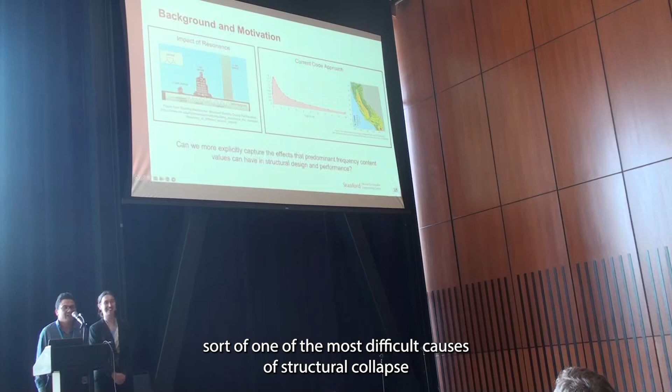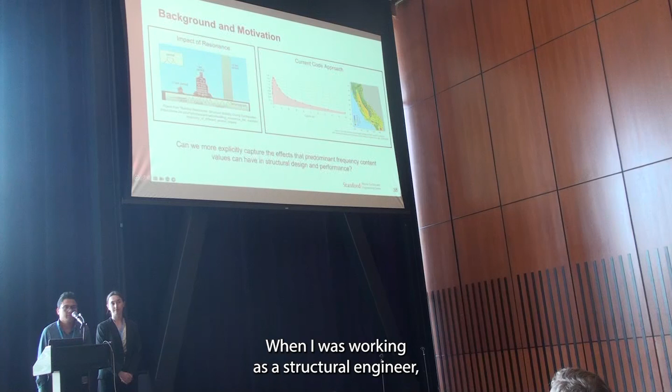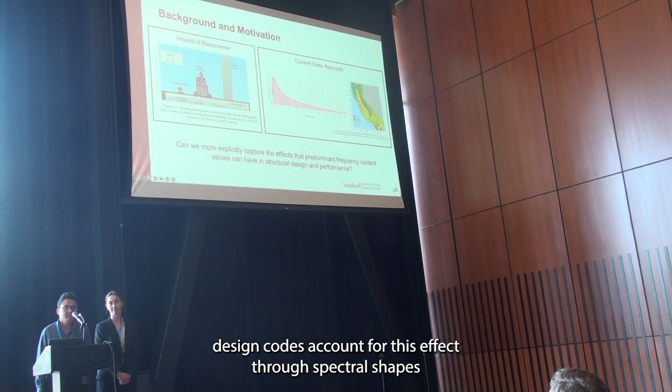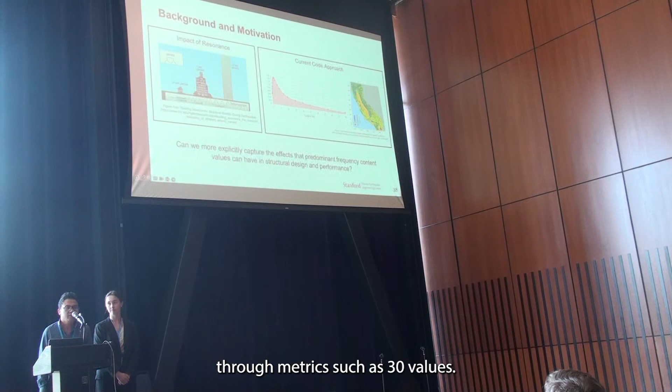Well, one of the most critical causes of structural collapse during earthquakes are the high dynamic displacement amplifications triggered by resonance. When I was working as a structural engineer, other colleagues and I were always wondering about how we could more explicitly account for these effects in our seismic designs. Modern design codes account for these effects through spectral shapes and for local site effect amplifications through metrics such as VS30 values. But the question here is how, or can we, more explicitly account for these effects in seismic design?

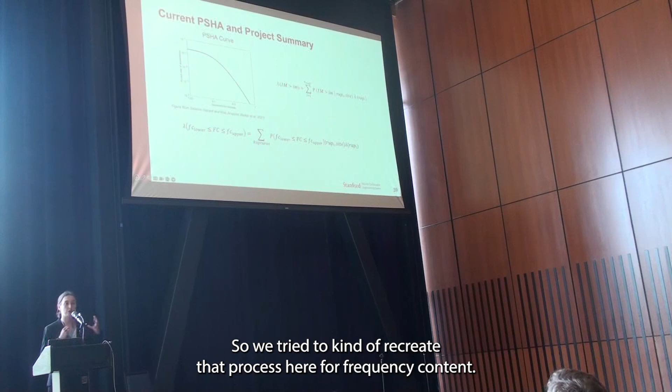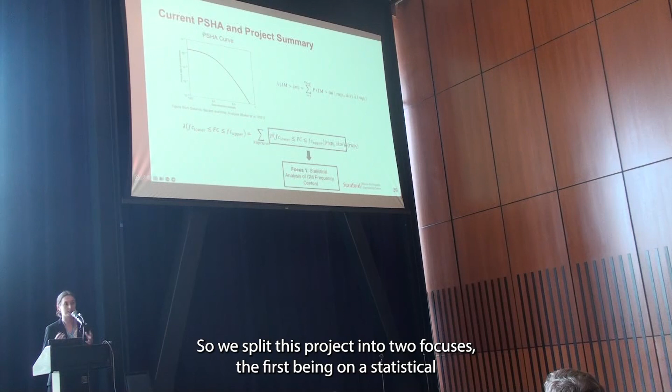So when we were thinking about how to capture this effect of frequency content, we tried to frame it in the same way you frame a probabilistic seismic hazard analysis, which is based on the probability of a certain intensity metric given rupture and site characteristics. So we tried to recreate that process here for frequency content. So given a certain rupture and site, what kind of frequency contents are likely to occur? So we split this project into two focuses, the first being on a statistical analysis of ground motion frequencies, and then the second being on how to actually interpret and share those findings with practicing engineers.

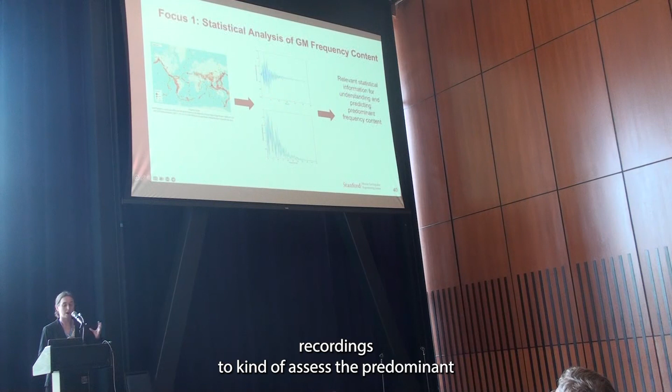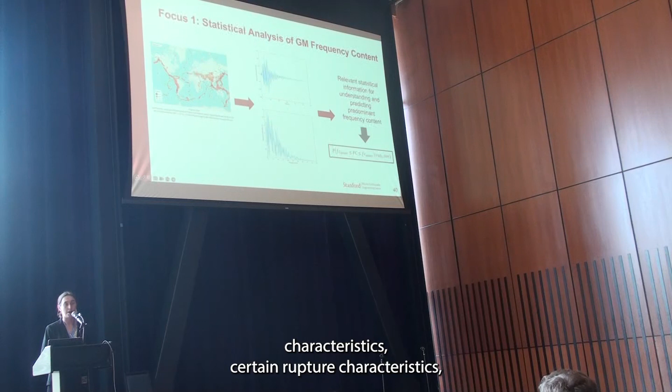So moving on to our first focus here, we are hoping to use existing ground motion recordings to assess the predominant frequency contents of ground motion time histories. We want to determine if there is certain relevant statistical information for understanding and predicting frequency content. So this could be things like certain site characteristics, certain rupture characteristics, anything that could contribute to a certain frequency content being more or less likely in a given scenario. We're hoping to develop some kind of probability model based on rupture and site characteristics to predict likely frequency contents.

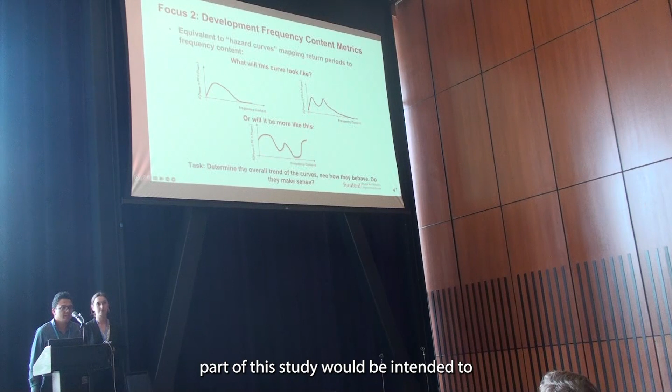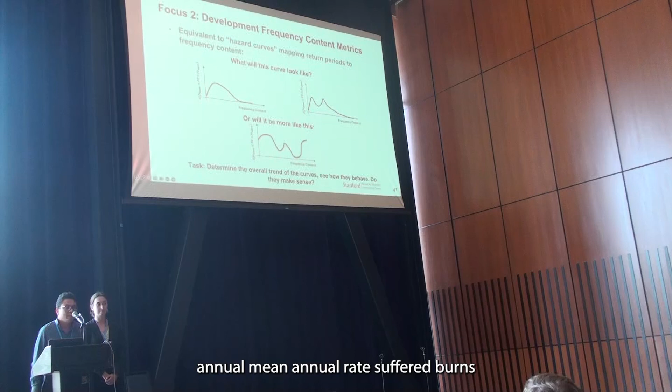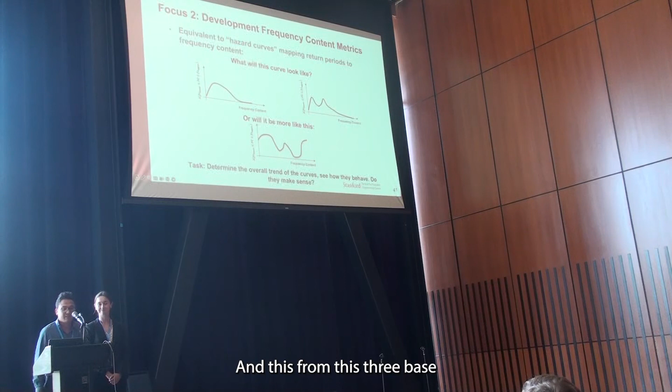Well, the second part of this study would be intended to try to find the equivalent of seismic hazard curves mapping mean annual rates of occurrence to frequency content values. And as a relevant part of this stage of the study, these frequency content values would be mapped to a dynamic amplification factor in this case.

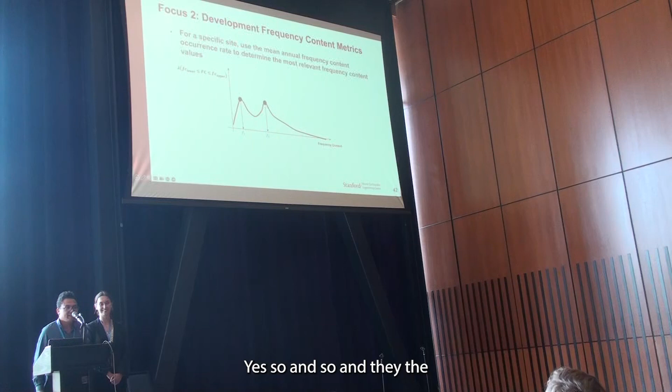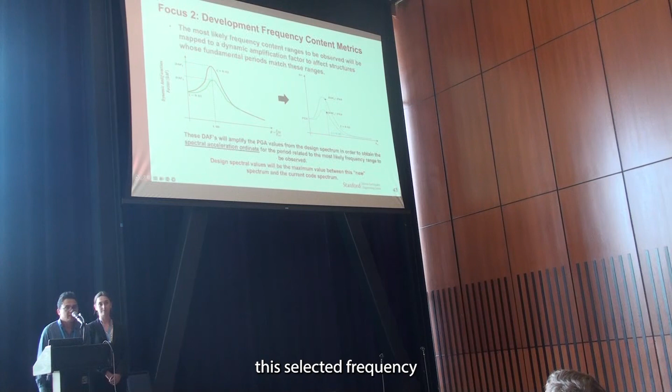So unlike the traditional probabilistic seismic hazard analysis framework, here we will try to find the frequency content values that maximize the mean annual rate of occurrence, which could be considered as the most likely frequency content values to be observed at this site. And these selected frequency content values would be mapped to a dynamic amplification factor envisioned to affect the PGA values at the site of interest. These PGA values could be obtained from the standard probabilistic seismic hazard analysis framework.

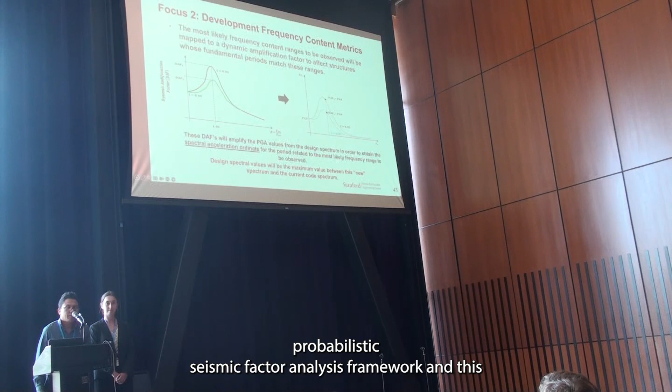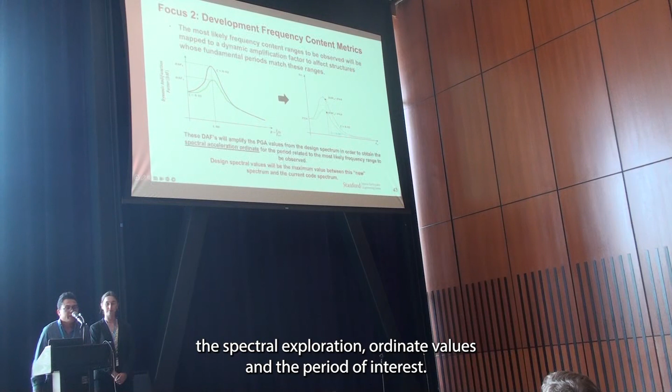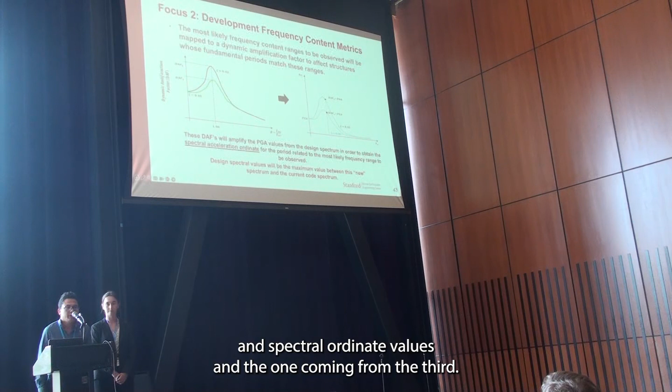And these dynamic amplification factors could amplify the PGA values to obtain the spectral acceleration ordinate values at that period of interest. Finally, the design value would be the maximum between this alternative spectral ordinate value and the one coming from the current design code spectrum.

An alternate way to interpret these likely frequency content values is to use it as a filter. So there are a lot of different things we filter and select ground motions for, intensities, durations, etc. And we could also use likely frequency content as another filter, either in the context of ground motion models or for selection of ground motions used in nonlinear structural analysis.

So as a final note, we wanted to talk a little bit about the project scope. This is definitely a longer multi-phase project, but there are no experimental components, and we're using all existing ground motions, so it's mostly human and computational cost. And finally, although this is an academic study, we're hoping to make it relevant for practicing engineers.